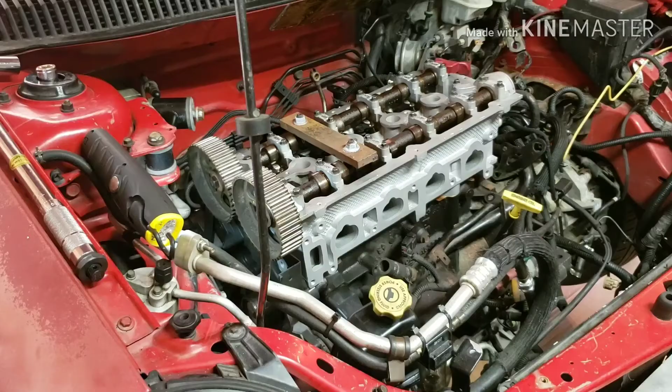Here's the timing. We're to that point now. See if I can get in there. All right. See how them lines are off a little bit? Now, this bar right here has it exactly where it needs to be.

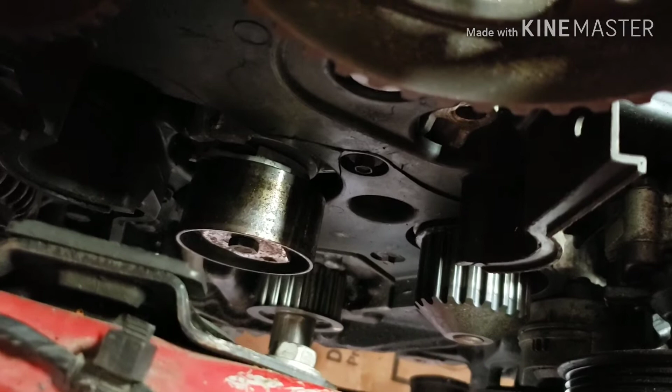Like I said in the previous video, they got little holes in top of the camshafts. A lot of people do different stuff with different types of tools to use that, but that Daryl Cox Racing, made for it. All right, and then we got a little tensioner down there. I'll show y'all how to do in a second. It's kind of a pain in the butt because you ain't really got all that much room unless you move the motor to the side.

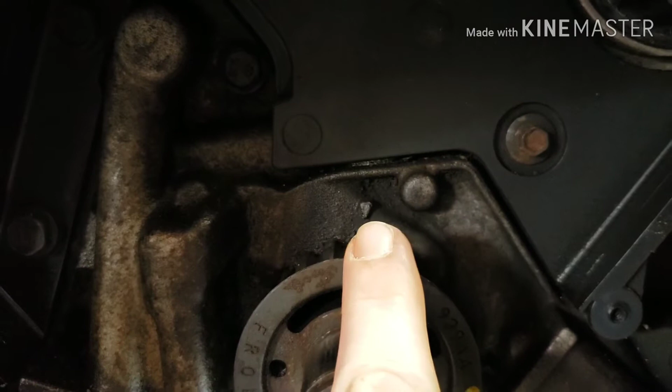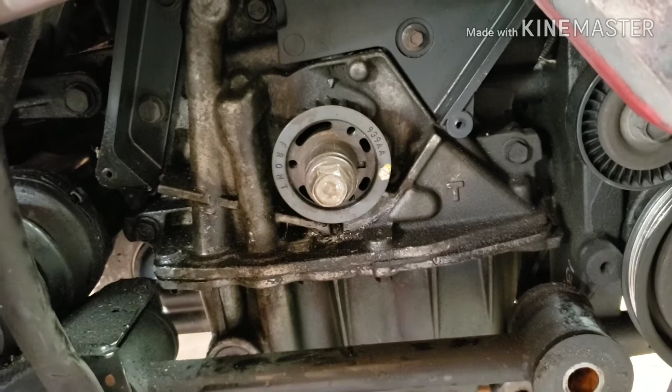All right, now we're gonna find TDC. So down here, there's a little mark right there, that little arrow, and then you got the arrow right here. You kind of want to trail it just a little bit in front of it, and when you turn this, don't go counterclockwise, you go clockwise towards the front of the car. Just keep from damaging the motor and everything.

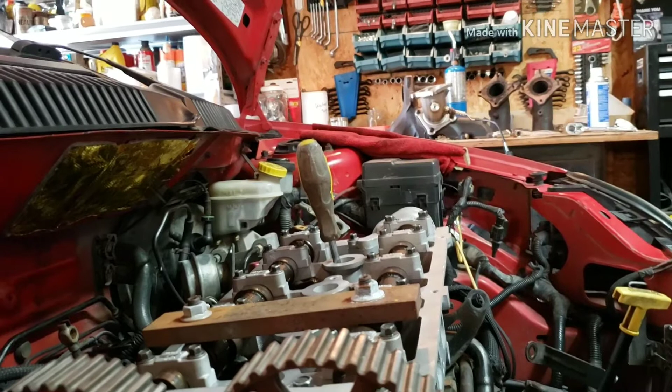All right, so let me get it to top dead center. Forgot to add, I usually stick a screwdriver in there and just keep turning until it stops and just about to start going back down. You know you're right at TDC. They got special tools and stuff you can put on there, but we're doing this stuff in the garage.

All right. Let's see if you can see. So that looks about right there. Just trailing it just a little bit. That should give you your TDC.

All right, so usually timing belt, it seems to work a whole lot easier when they're warm. So you can leave it out in the sunlight or put a heat gun to it. I would be very careful when you use the heat gun because you don't want to mess up your brand new timing belt. So I'll slap this belt on.

Did forget to mention, you can torque your camshaft bolts down to 85 foot-pounds of torque, but don't take my word for it. Do Google. That's what we found. Because we are not certified mechanics, so we are not responsible for any damages.

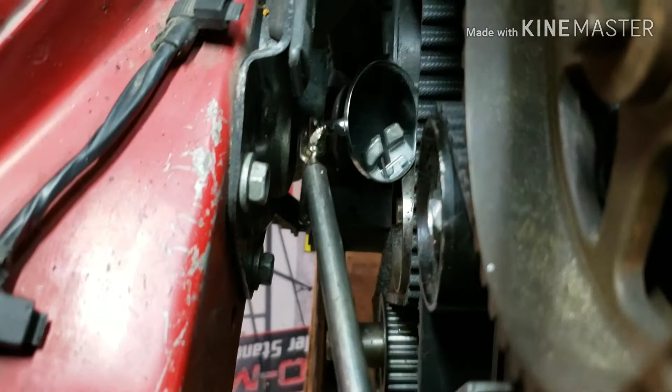All right, so if you look in the sight glass here, that is the mechanical timing tensioner. There is a spot for your 1/4-inch ratchet. You can move clockwise or counterclockwise, and it'll move it back and forth. That's kind of hard to see.

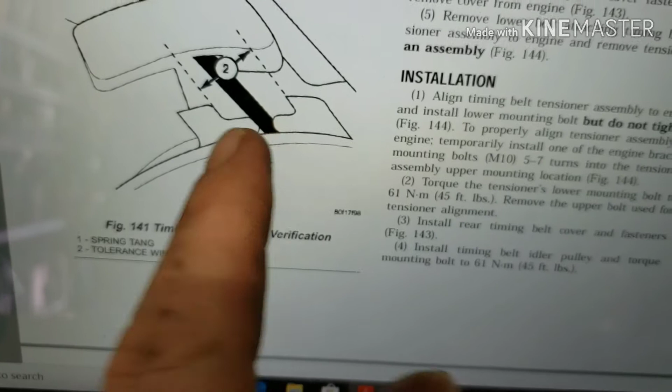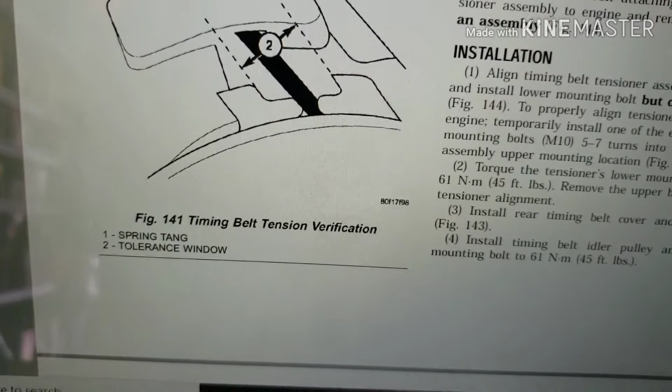But basically you want that pin to sit to the big side of that groove up top, and then on the bottom, which I'll show you on the computer, these grooves right here on the bottom, you basically want that pin in the center. When you get it close, there's a 13 on there that you tighten up a little bit. You don't want to tighten it too tight because you won't be able to move it. So you just tighten it enough where it'll stay when you let go, because if not, it'll bounce back around.

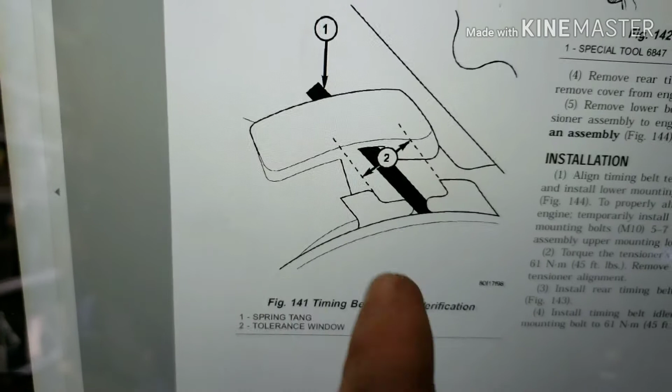So line these two up here, and then that groove is right here. So this pin will drop this way, and then these will come this way. And as long as that pin's center, you're good. But here's the instructions, just in case I'm not being very clear.

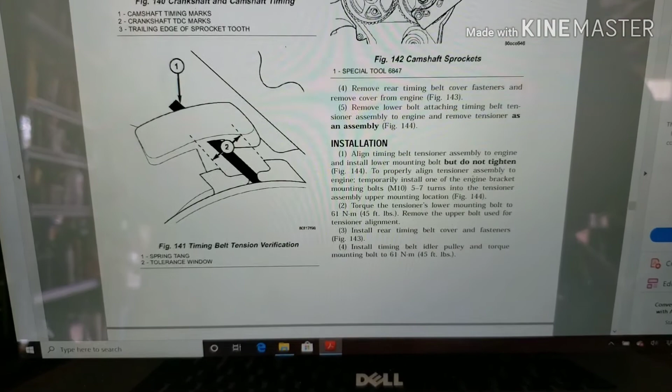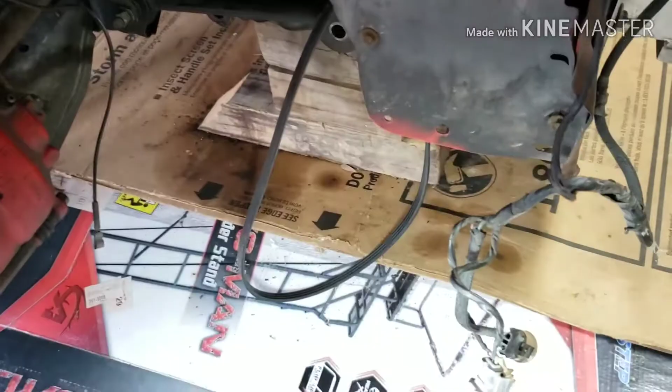All right, so here we have our timing marks. See, they're not directly across from one another, maybe a little less than half a tooth, but that bar really comes in handy. And then the mark down here, let's see if I can get that, there we go. You line that up there. Once you're done, tighten everything up, you rotate it clockwise and make sure everything's good. So far we're getting there.

Oh, and the torque for the idler pulley is 45 foot-pounds of torque. But then again, Google, make sure. All right, so I forgot to mention, the cam alignment tool for this was originally for a 420A Eclipse. And we were just curious to see if it did fit, which surprisingly it did. So if you have one of those and you happen to have a 420A Eclipse, you can use it.